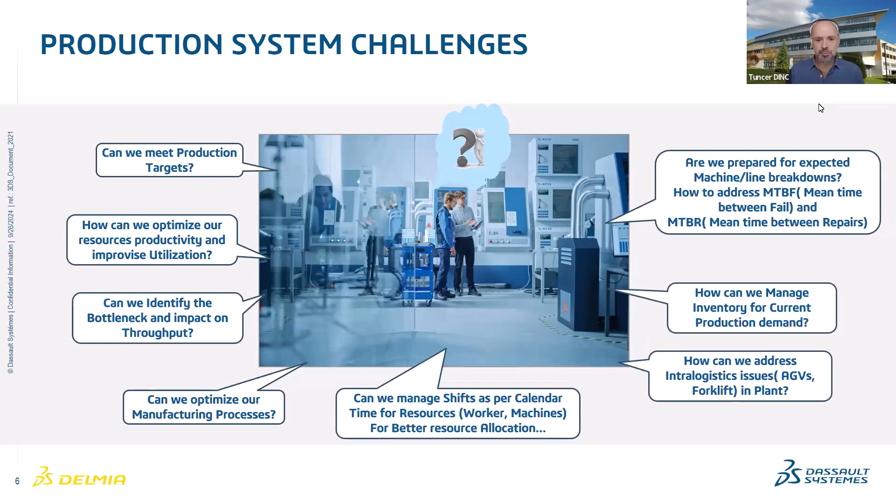We will talk later in more detail. In equipment simulation, you are able to analyze your equipment, with mechanisms, distances, and clash detections. You're able to analyze your toolings and equipment in more detail and simulate them. In factory flow simulation, we take a more generic view of the factory and analyze bottlenecks, intralogistics, capacities, warehouses, and also production areas.

These will be shown now in our webinar, and thank you for joining, by the way. So let's go ahead and see what's next.

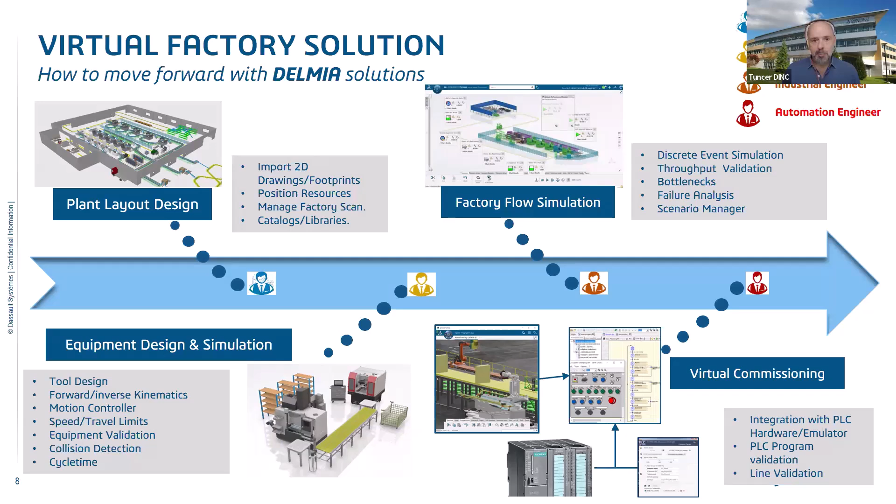This video shows you plant layout design. So we start, as you saw previously in the roles, from plant layouting.

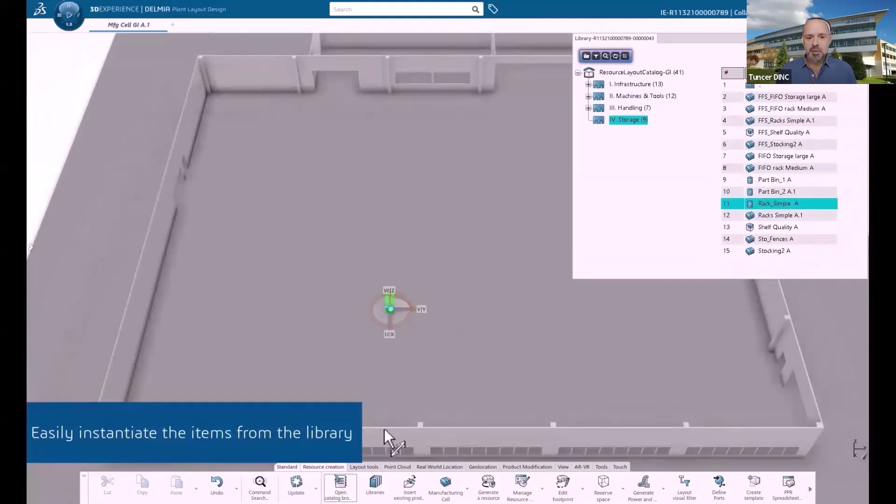You see on the right-hand side, the library manager with classified resources. I'm able to place my resources inside the building. It can be a BIM building, IFC format, or you have a connector to Revit. So we are able to use the real building to instantiate our resources from a library.

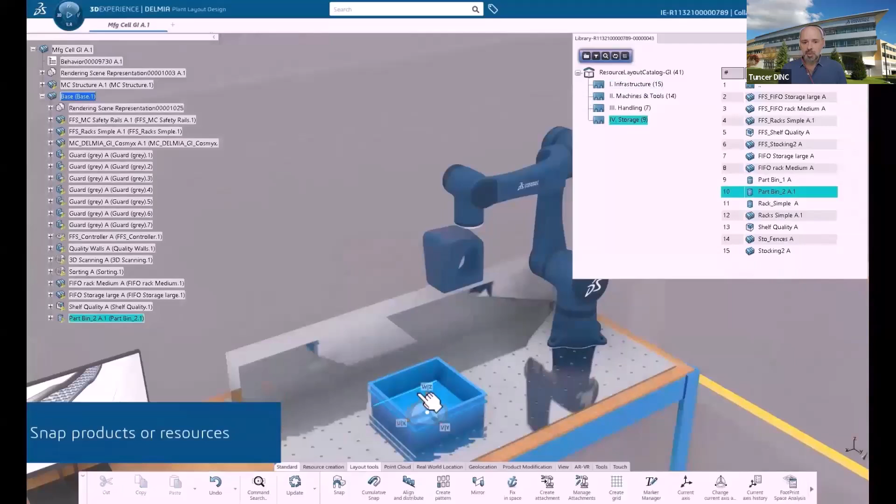You see here how easy we can align and distribute our resources in the production. Also with advanced tools like Snap and Cumulative Snap, we are able to position the resource on the correct location. You see here on the table how to change the references of the objects easily to place them correctly in the rack.

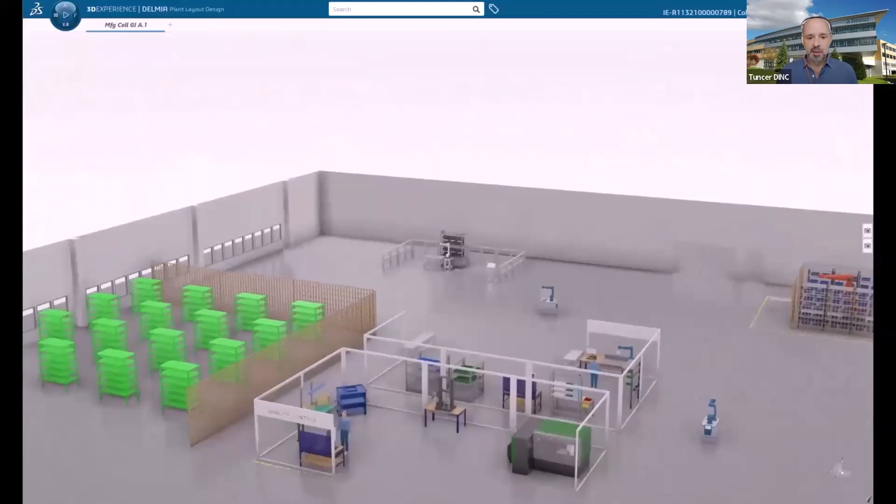Here we see a small deep dive, so very detailed information by the end. You see here also the robots which can be programmed in equipment simulation and virtual commissioning. That means we have a huge robot library with a lot of different robot vendors to be used.

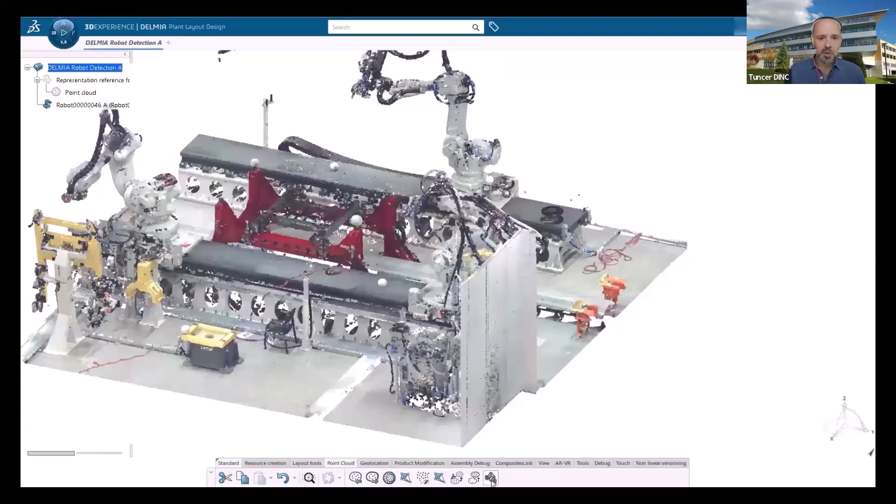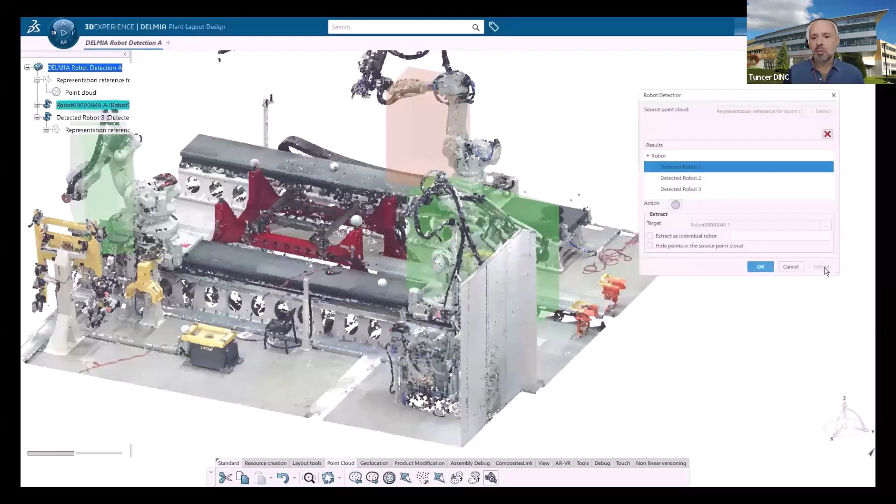Here you see the point cloud section, very powerful: point cloud, E57, XYZ, ASCII, and so on. We are able to import these point clouds directly into the 3D Experience platform, and we can recognize different objects. You see here the robot can be recognized, replaced, and later on you can do your offline programming directly using a point cloud, because we don't always have factory design, or the buildings are quite old, so we need sometimes scans to bring it into the 3D Experience platform.

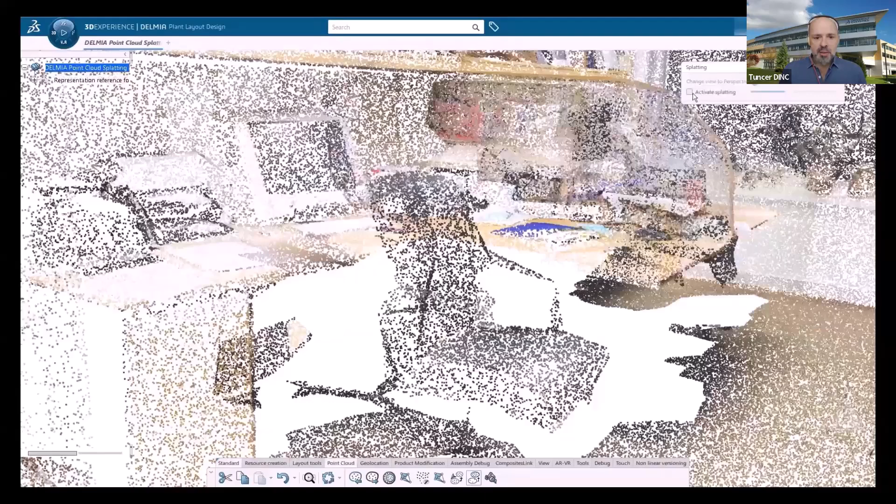You see here also some news in plant layout, which is also quite powerful: changing the visualization of the point cloud. Sometimes it's difficult to understand, dependent on the points, how many points are in the scan, what is the geometry. This is a quite new functionality to change the visualization of the point cloud.

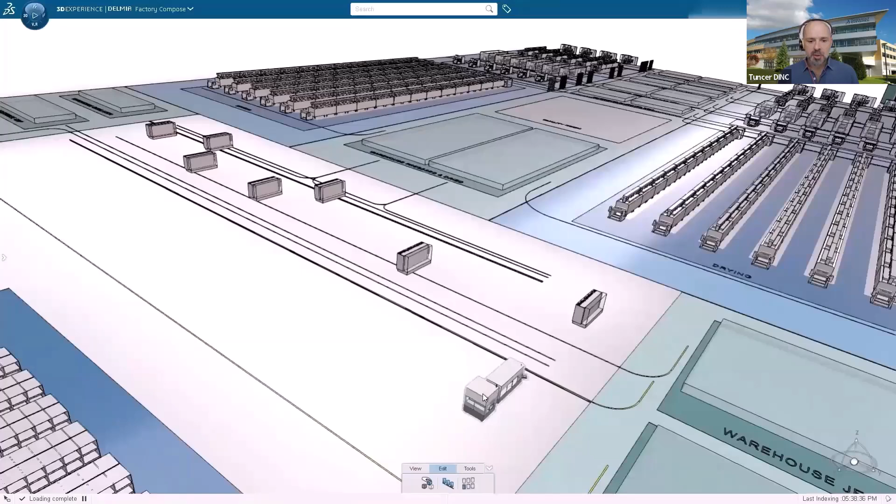Here again you see a huge factory, easy methodologies. The difference here is it's not in the 3D Experience platform directly, it's in the web browser. FLR is a new functionality, a new role, where we can do your layouting in the web browser in a widget, and you're able to do your layouting directly from the web browser.

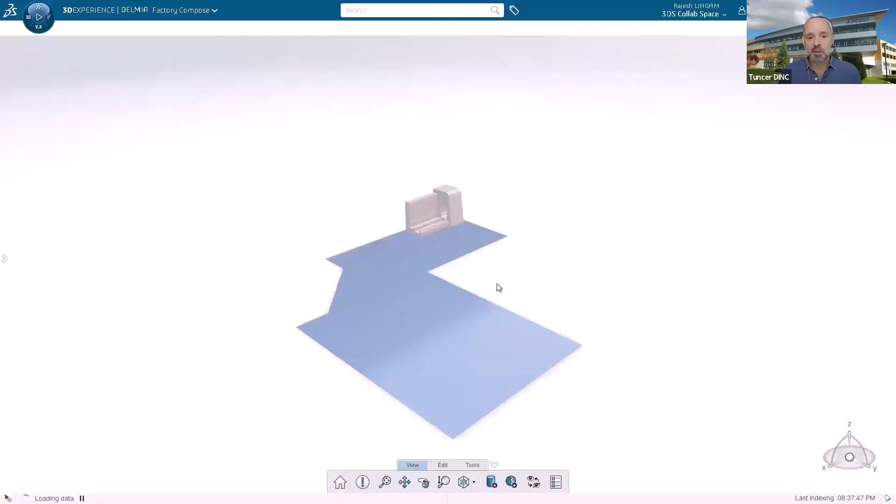Same here, this is still factory compose, as a role FLR. You are able to do your layouting everywhere with the web browser connected to the 3D Experience platform, and easily instantiate your objects from a library directly from the platform to your layout. Immediately you can then prepare the session for anybody else who needs to do a factory flow simulation or anything else.

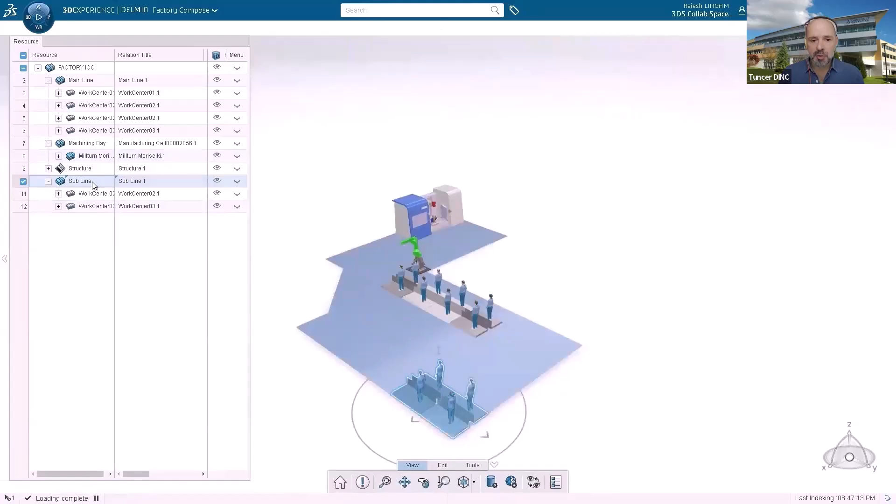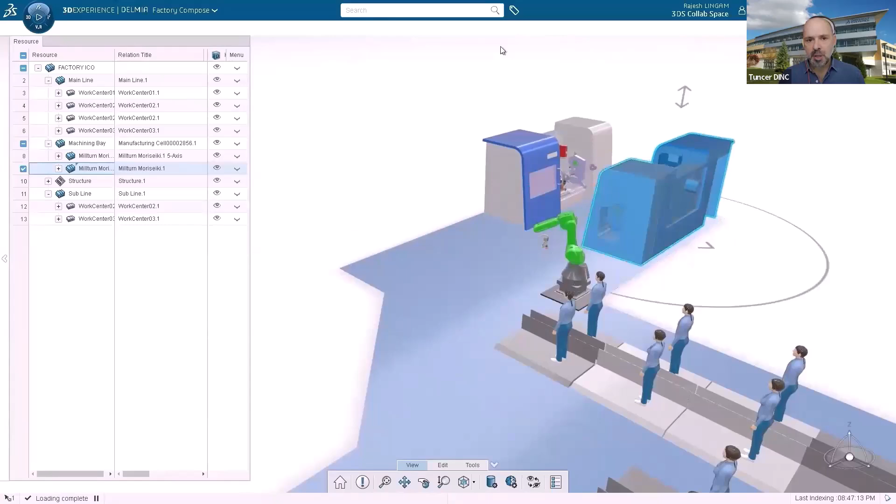So we see here how to place the machines, how to position the machines, how to generate the resource structure, to rename the objects, and to position them correctly in the layout. Very easy, fully supported through the web browser, and the role, as I said, is Factory Compose, FLR, fully web-based.

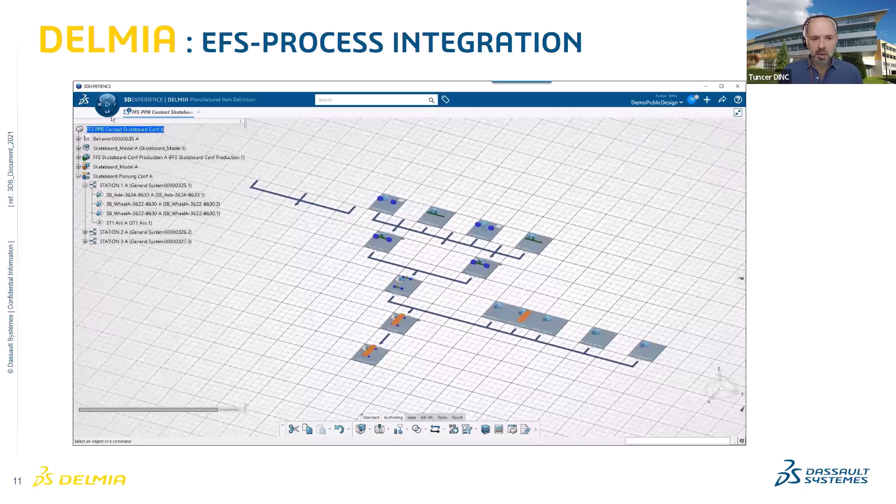So here we see a quite important topic, not to say the others are not important, but this is a PPR context, meaning product, process, and resource. Quite simple scenario, but very powerful, because it's a configured product structure, a configured MBOM, and also a configured process.

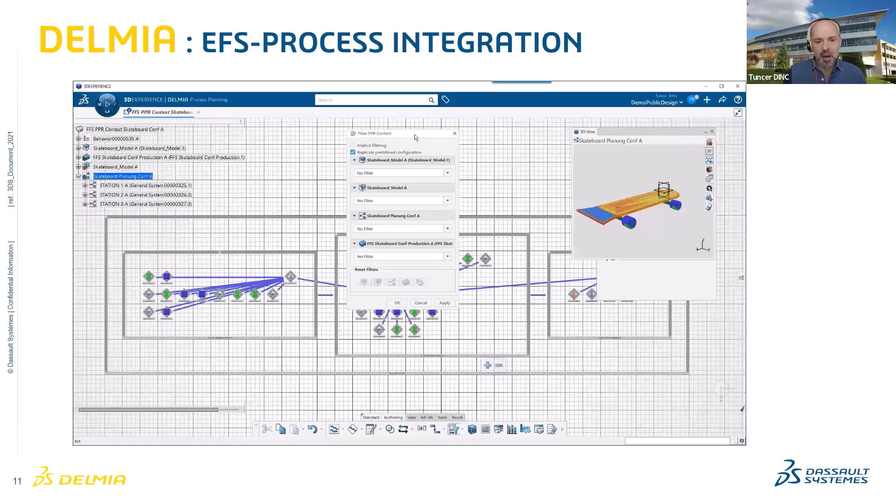We use here different product variants. They are planned in a 150 EBOM, 150 MBOM, and 150 process. You see here how we do the in-session filtering, and dependent on the variant, we see only the processes which are necessary. This is fully integrated into factory flow simulation.

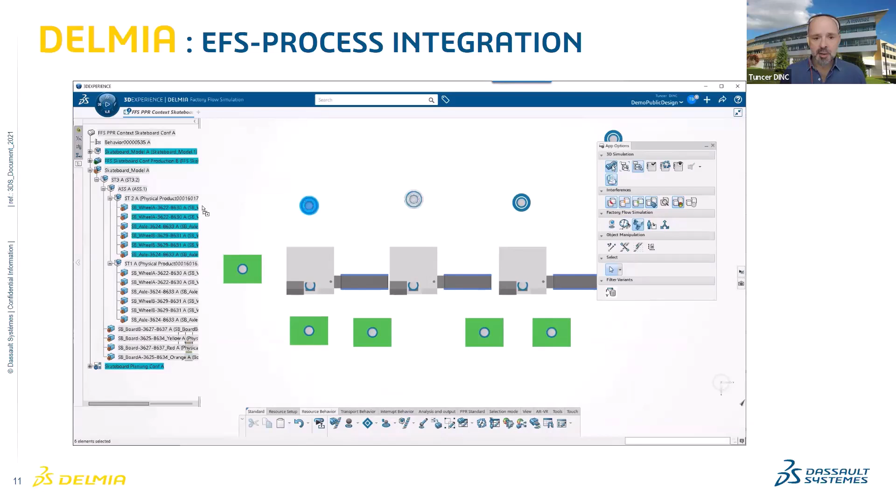You see by drag and drop, we assign the manufacturing BOM into the in-zones, and we do the same with the processes. That means we consume the entire planning information into the factory by drag and drop. So here you see the process structure, meaning station information, processes, process sequences, and process times, used by drag and drop into factory flow simulation.

And then the driver is not anymore this guy who is doing the simulation, the factory flow simulation engineer. The driver here is the process planner, who plans the process, who decides in which station which processes need to be executed, with the estimated time, analyzed time, enriched by time analysis. So the driver is always a process engineer.

And at that time where we get a new revision of the process of the MBOM, of the EBOM, it will reflect then automatically the simulation.

And so you have an easy integration from a PPR planning structure to factory structure, which will simulate then the process information easily. Here you see how to access the configuration.

So here we generate the configuration sets, meaning everything which was done in the process is used in the simulation. And so we define which variants need to be reflected in the simulation.

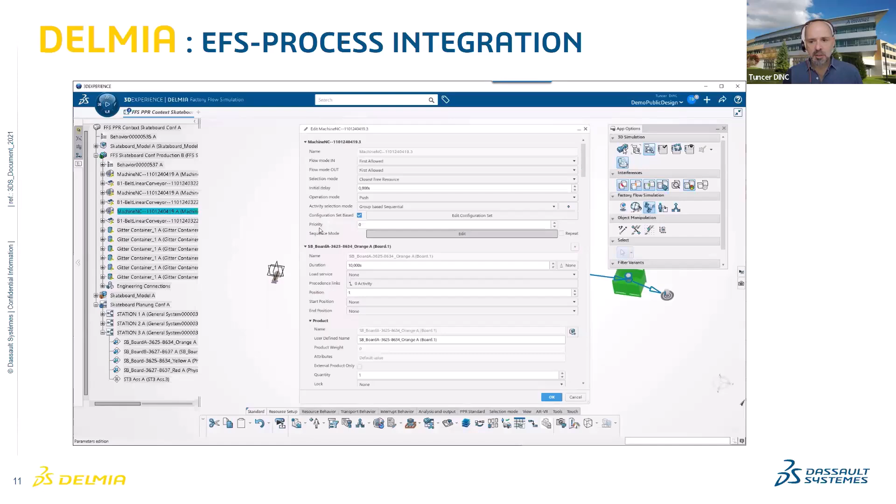So you don't need to code anything. There is logics information which can be coded, but this is only if you need some specific behaviors on specific machines and resources. Most of the functionalities are out of the box and in the user interface.

This makes it very simple also for a layouter to do a simple simulation without having any knowledge in programming. So you see now easily these variants are produced dependent on my production schedule.

And so you see the machines running, the conveyors running, because all our resources already have the intelligence to be simulated. So if you have any other geometry which is imported, you can easily do it in equipment design

or equipment simulation, as Ali will show later on, to be able to use it in the simulation in the factory.

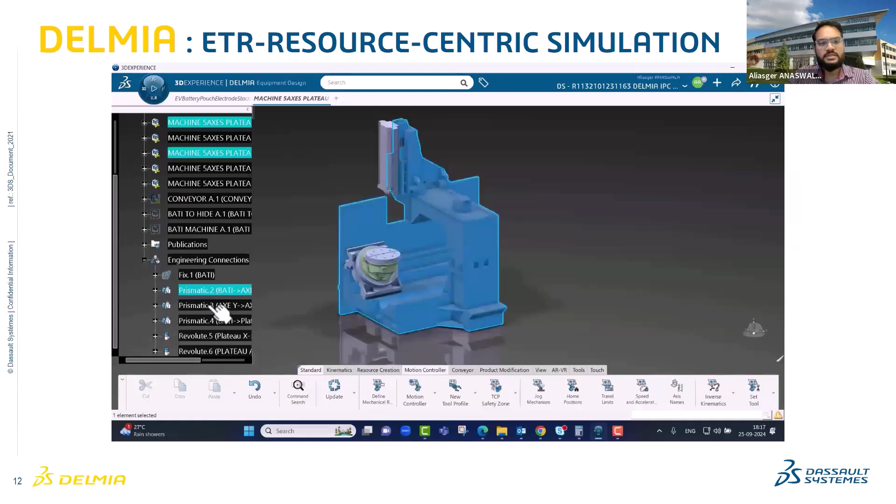Here we have a 5-axis industrial machine and some engineering connections are defined onto it, developing some kinematics. These are between the specific elements of the machines. Related to these engineering connections, these joints and commands are created.

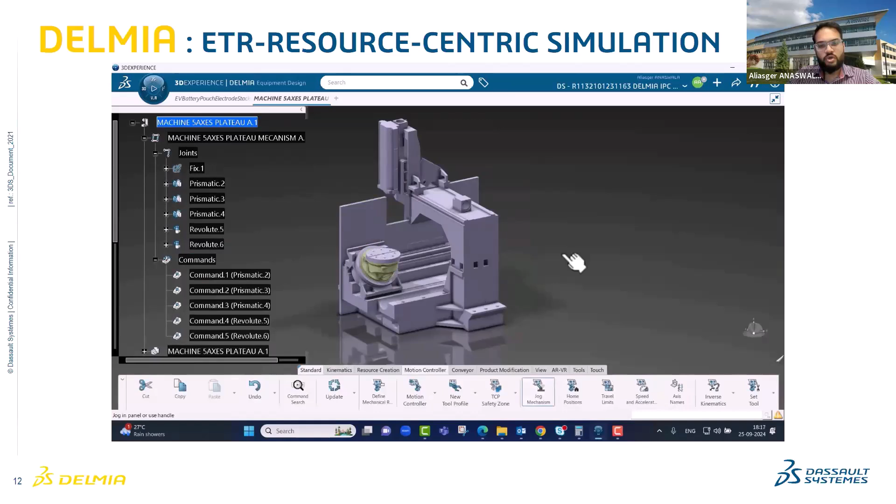Now, inside equipment design, we can check which mechanisms are there, and as a mechanism manager, what is the degree of freedom status, allowing us to jog them with respect to individual axes and creating a kinematics as well. So this inverse kinematics can be done with the robot, and can be taken forward.

Next is to define some home positions within this so that they can be directly used when we are teaching this machine for some programming, an NC program, or even to use it directly in factory flow simulation.

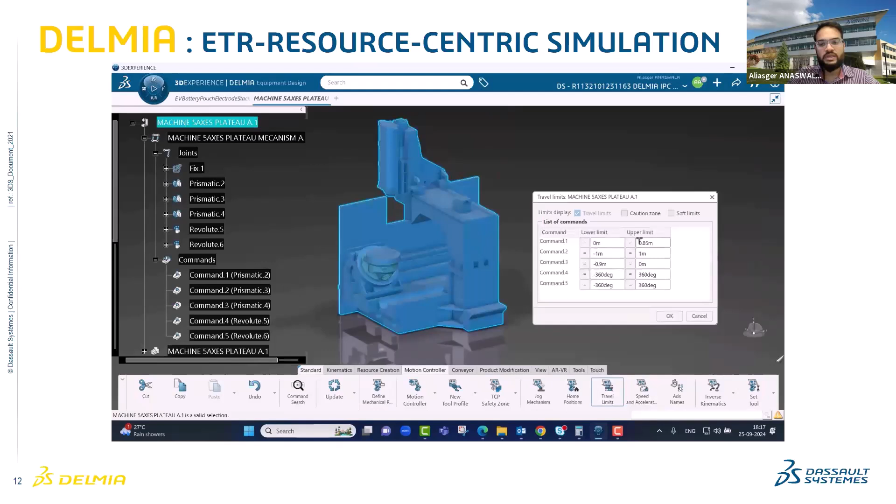Travel limits can be defined onto it, providing soft limits as well. The color coding will be there for soft limits, defining that it cannot go beyond this point. So while simulating, it will give some warnings and signs.

Next is to simulate the equipment inside equipment simulation. Here, if you see, this is a master task where the sub-services or the sub-tasks from individual robot cells are called upon, and they will run in parallel because the functionality is provided in such a way.

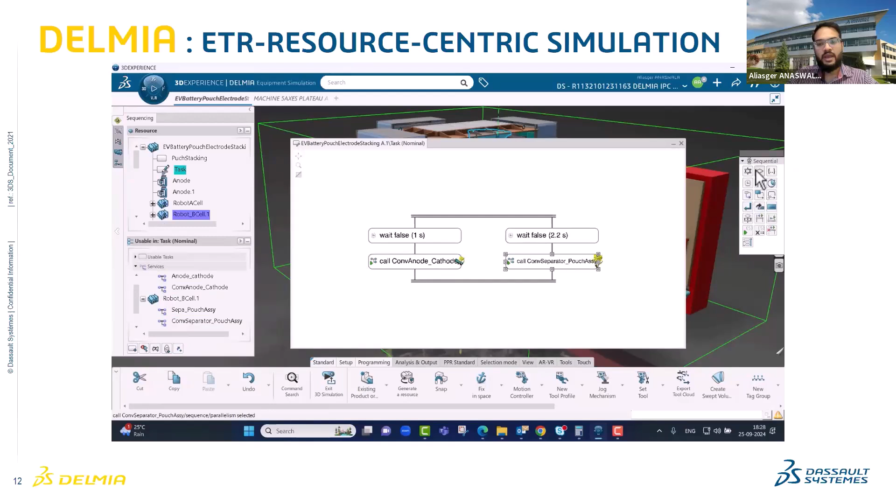There are other conditions that can be applied, such as wait for conditions and other things. More to this, if you go to the individual robot cells, the control equipment is defined for this particular robot equipment, which will allow us to use it for different functions as well, for different cells.

In the setup, we can teach the program for this control equipment for this particular robot, and see the individual conditions that can be applied to this individual robot, not just to the main task.

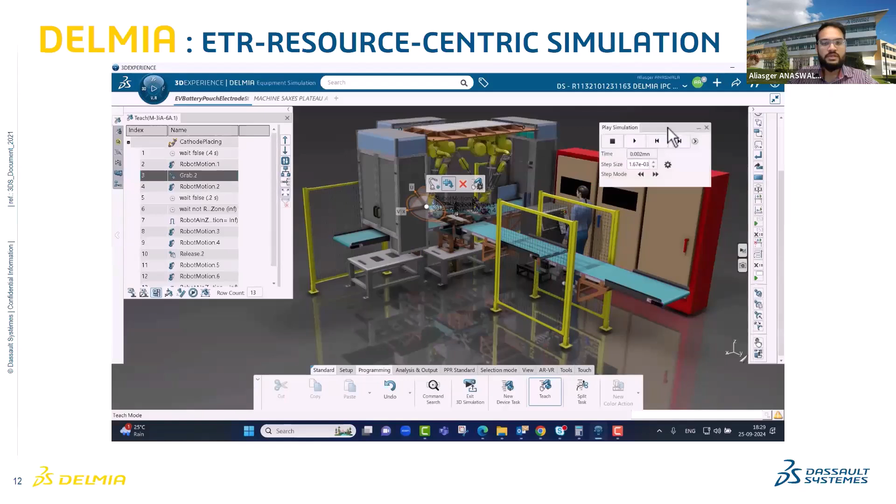Here we have defined some grab activities, some fault conditions, and the release activities, to have a realistic scenario of how it will perform in the actual environment. Now, these signals can be linked with the robot input and output signals as well.

Once we come out of this teach pendant and click on the control equipment, it will show us the signals that have been generated at the resource level. This can be propagated to the master level. This is for robot cell B. As an input output, signals are provided.

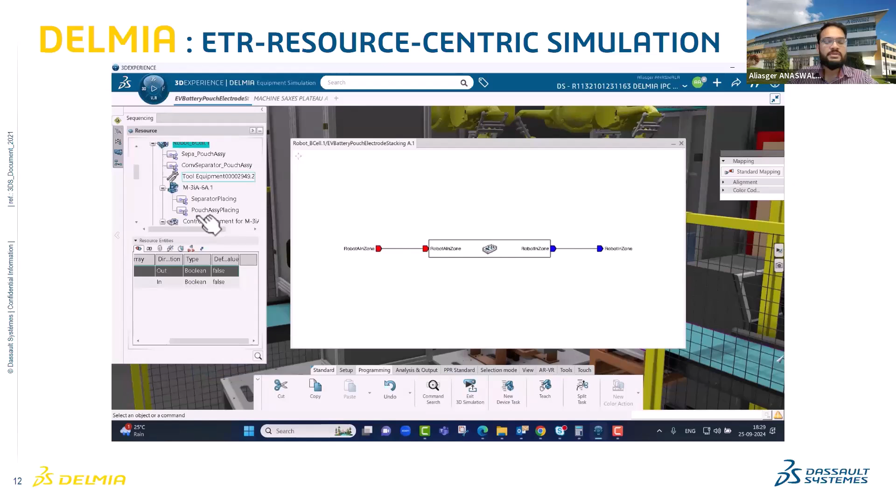The same can be seen in the IO mapping editor for this robot or for this control equipment as well, where we have linked this with the higher level to have a multi-robot simulation like this. This is for robot B cell. The same is applied to robot A cell, and then it is propagated to the master cell.

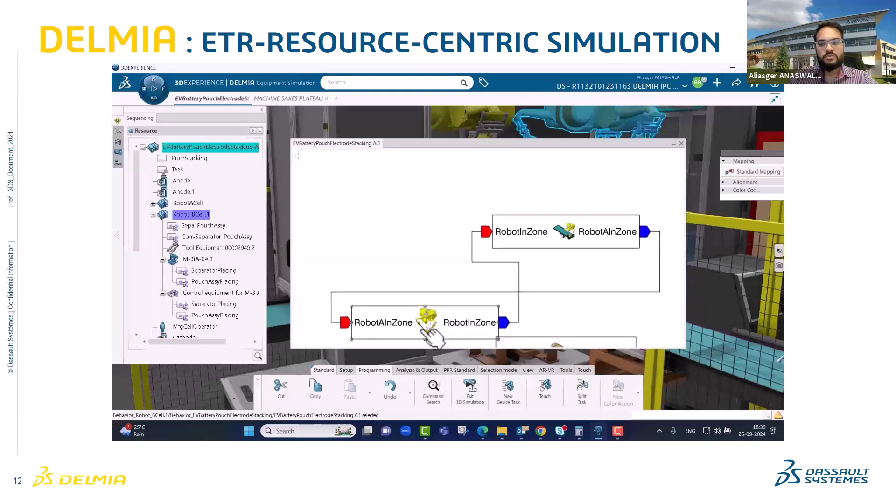Inside the IO mapping editor, we can have these definitions. So both the robots are interconnected with each other, to avoid interference and interlock with each other.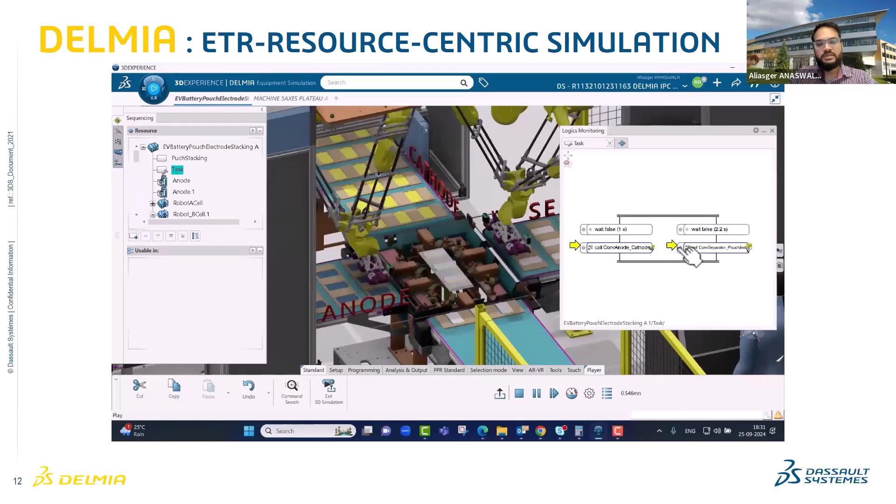Now, when we simulate this as a master task, we can check the live signals when the simulation is running, which task is running, and even we can play and pause those tasks. This really helps if we want to do an equipment simulation at a resource level, understanding collision impacts and cycle time of this robot, and then later take this when doing factory floor simulation.

If we want to stop one of the robots and see how the other robot is performing, we can play and pause those tasks and have an overall idea.

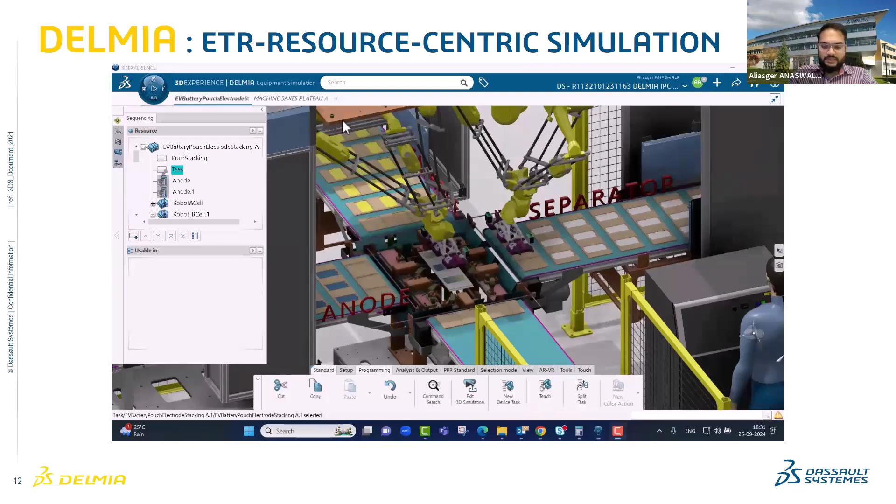This was all about the resource-centric simulation. We now go forward to factory floor simulation. In factory floor simulation, we'll first take the Kanban management.

When we say Kanban management, and when we say that we want to run the production system on this aspect, it is in a way to run it in a pull mode.

Now there are basically two modes, push mode and pull mode. Push mode is about building things built to stock, like we have in a T&M industry or automotive industry, where we build items, stock them in the inventory, and later push it into the market.

Against that, there is a pull mode of working, which is a kind of build to order, like in a high-tech industry or in the aerospace and defense industry, where we produce as per the customer demand or as per the order received by the company.

Here, based on the order specific to that order, we pull the parts into the production from the supplier side as per the demand, in one way to also implement the just-in-time manufacturing scenario.

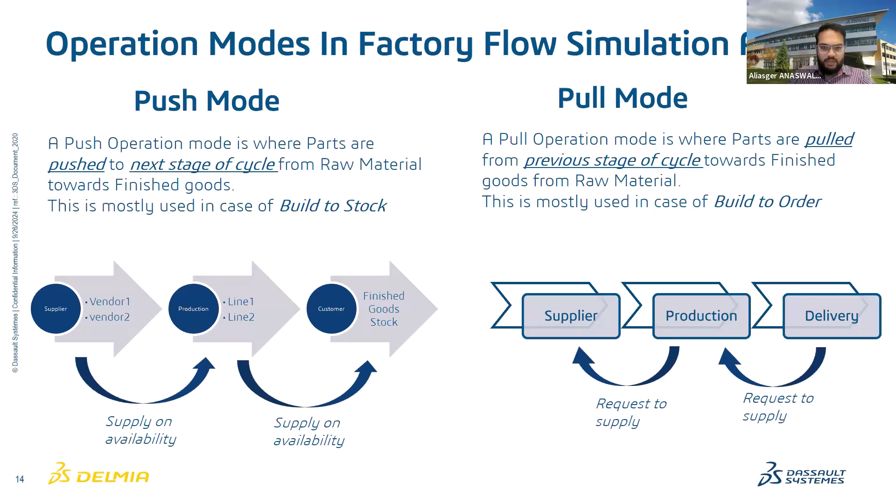We'll have an understanding of how a typical Kanban production loop will work. So based on the customer demand, week-wise or month-wise, we prepare a production demand planning for that particular week. Based on this production demand planning for different assembly lines, we build a dispatch order.

We build a leveling board, which allows us to define which product we need to dispatch at which point of time from the resources or the dispatch area. With the help of this leveling board, the production cards and the withdrawal cards are triggered.

Based on this dispatch order, one withdrawal card will get triggered at a particular time, meaning one part will be dispatched from the company to the supermarket or to the customer area.

This triggering of the withdrawal card will pull one item from the safety stock, and this will ultimately pull a production card, triggering the production line to build one more item, generating a request.

Basically, triggering of the production card will pull an item from the pool stock or from the supplier side. So the supplier will get an intimation to produce one more part.

Following this way of production allows us to maintain the inventory level, stop overproduction, and meet the customer demand in a way to have a just-in-time manufacturing scenario.

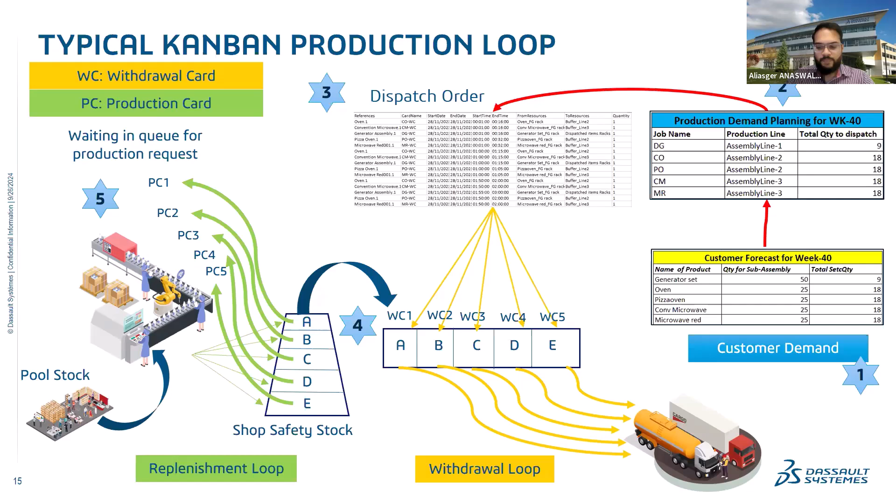We have created a short scenario or demonstration of both a push mode and a pull mode. In this video, we'll talk about when we run from a push way of working, where we have excess supply, and how we can avoid this kind of challenge when we run in a pull way of working.

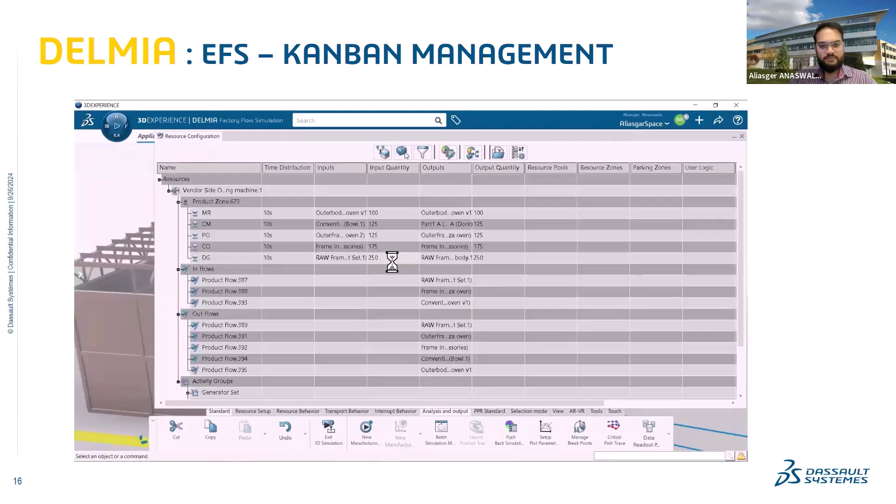So this is a small setup where there are 3 assembly lines, a dispatch area, and a supplier side. Here there are 5 different products that are manufactured, and for these 5 different products, these are the groups based on the customer demand. This schedule has been provided on the supplier side, so it will, in a push way, continuously push the parts to the assembly lines.

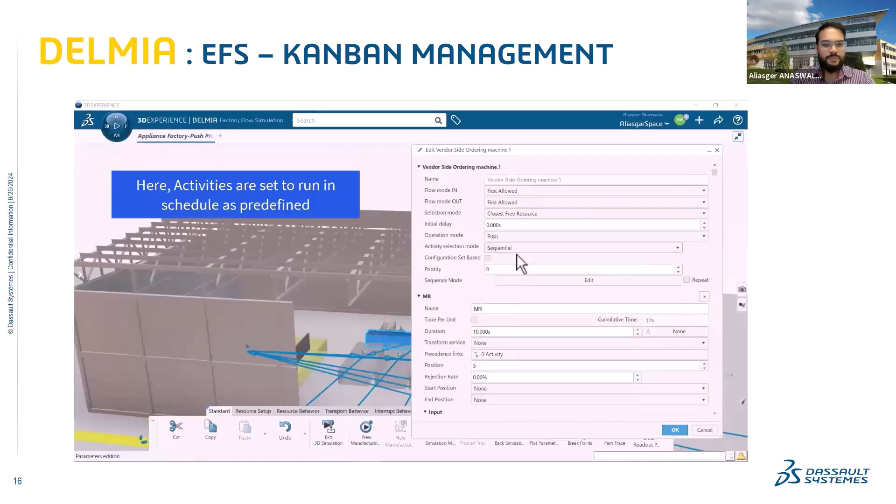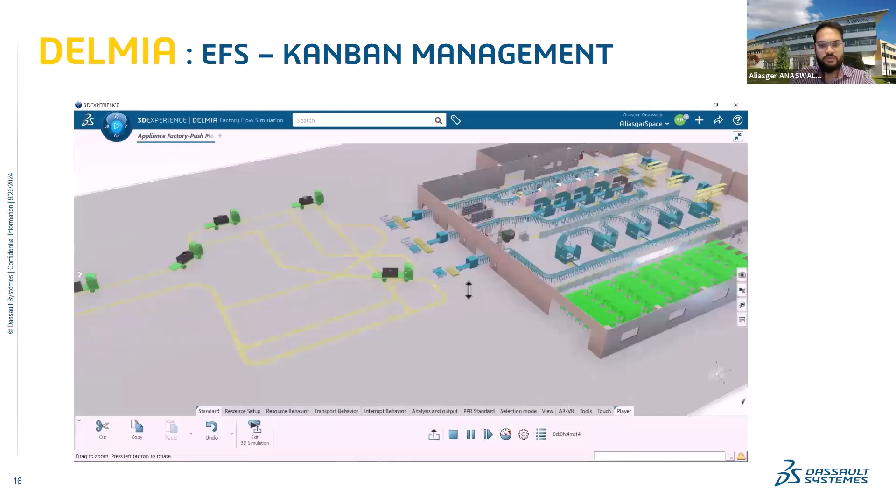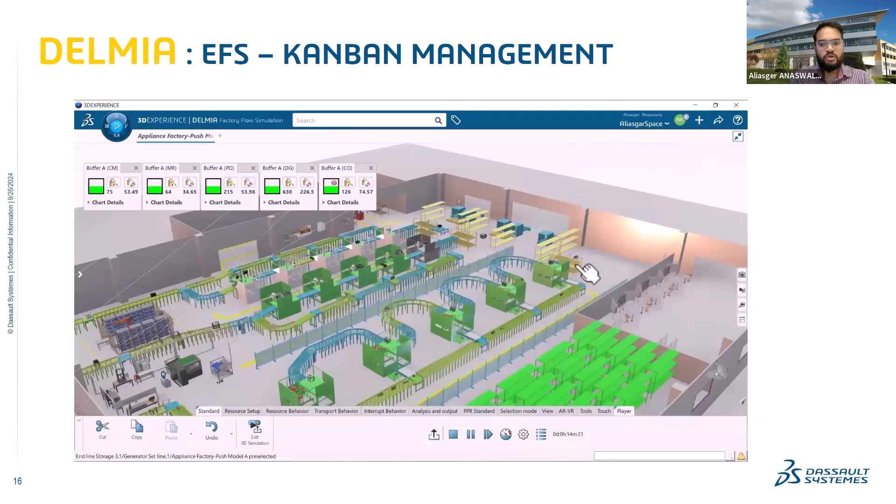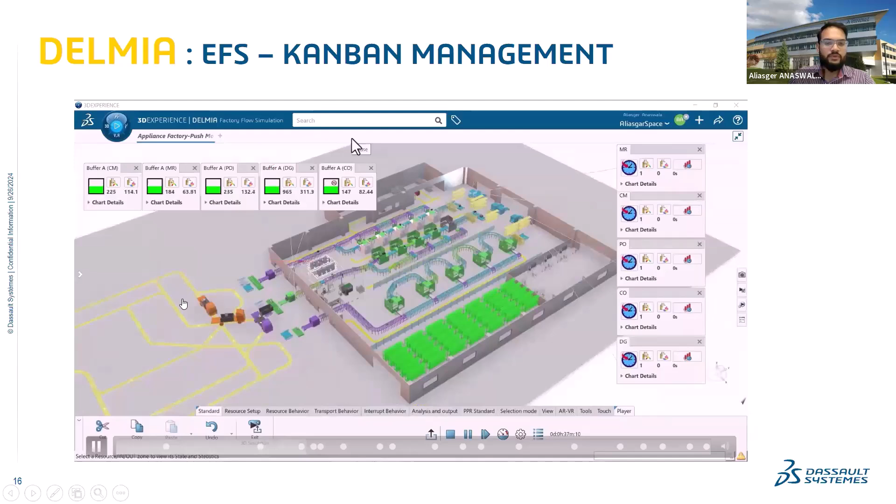After a certain time, this will be overcrowded because there is a limited inventory on the feeder side. With the excess supply, the line will keep continuously pushing to produce more parts. So what we see over here is the number of buffer or inventory at the start of the line, overcrowding or hitting the upper level of the inventory. Let's say by 1 hour we produce this much stock or one lot, but we have an excess of supply over here. So this is overcrowding in one way.

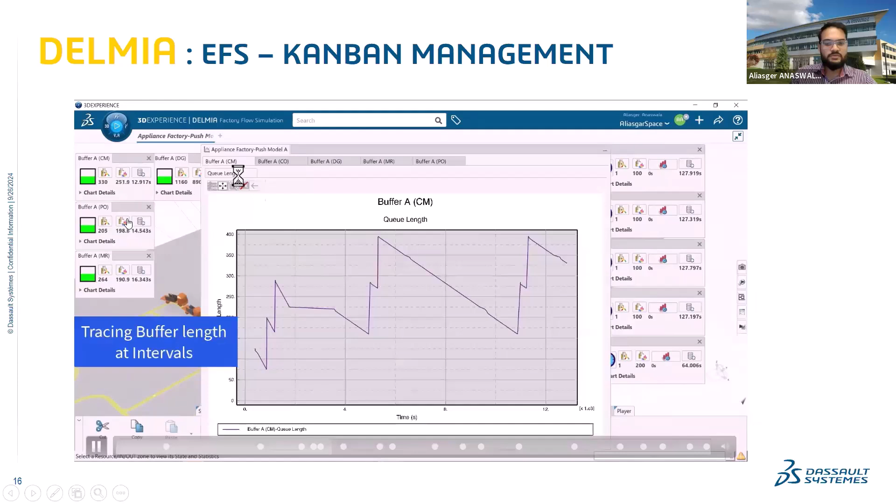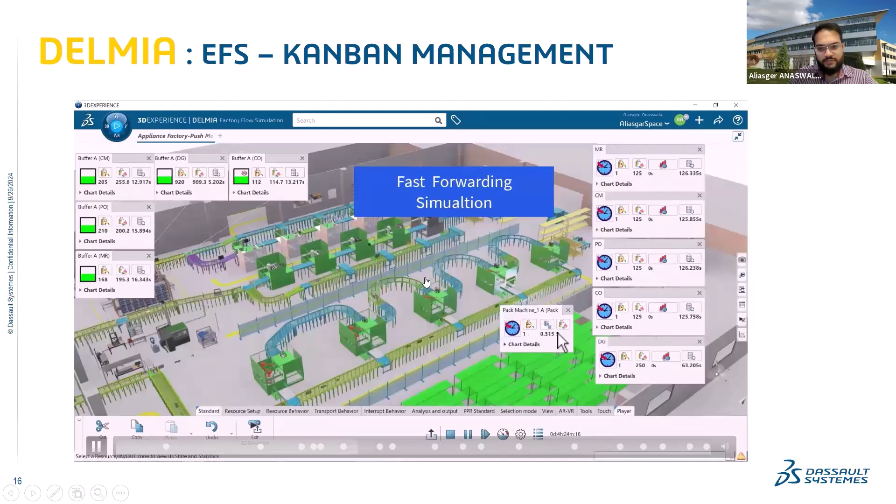That is one of the challenges. If we check the queue length for the buffers, it's always high because of the excess supply from the supplier side to these production lines. Going a little fast, after 1 day of simulation we have these records, and at the end of the shift we are able to produce 225 parts.

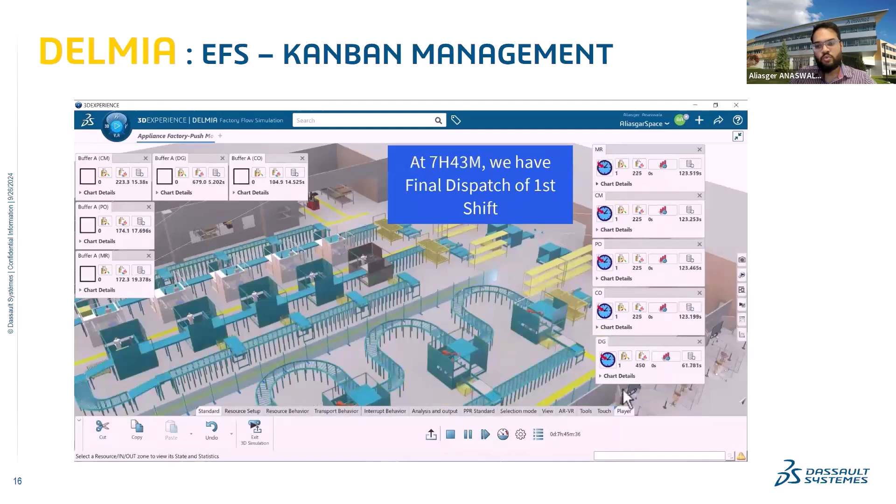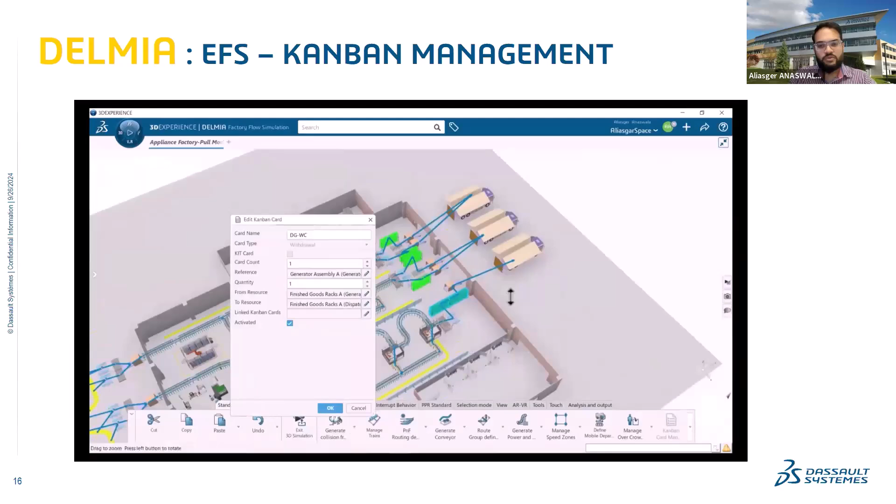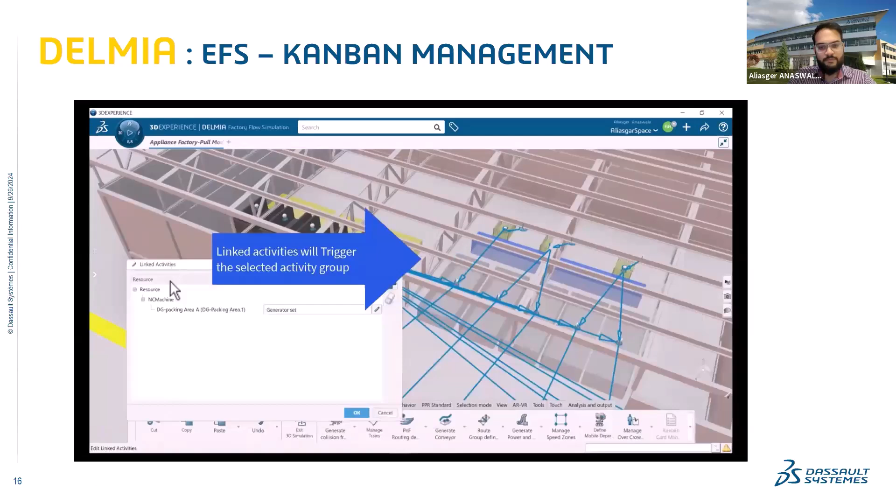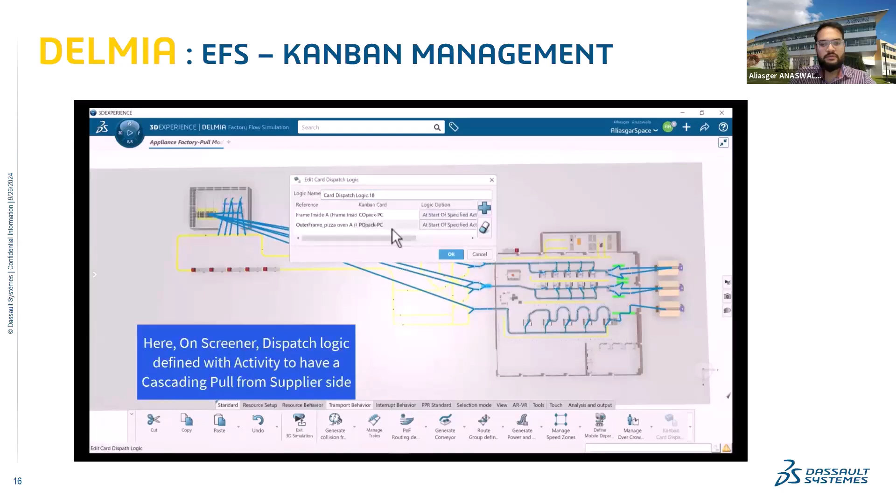Now, against this push mode, if we run the pull mode, first of all we will define some production card and withdrawal card for the products that we have to produce. We will apply this on the dispatch side, from and to the resource from where this card will get triggered. The production cards will be applied to the machines on the supplier side, which will push the supplier to provide the parts when they are required and not before that. The dispatch logic triggers where this withdrawal card needs to be applied on the machine.

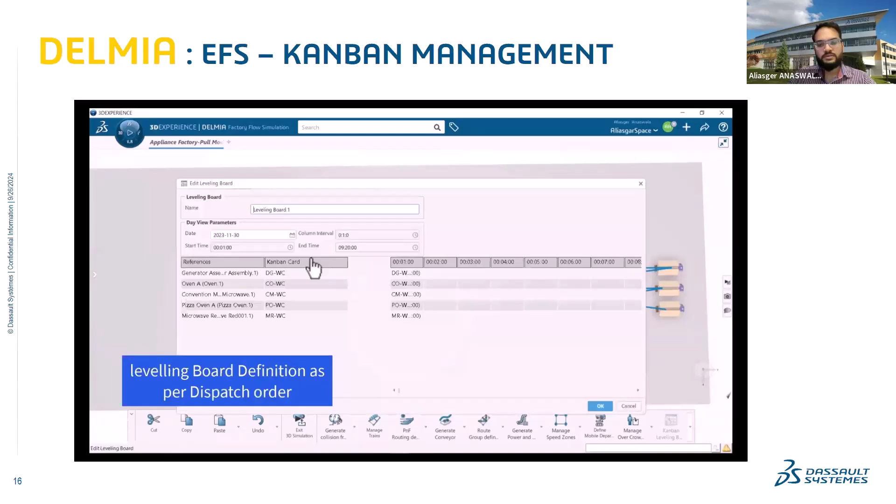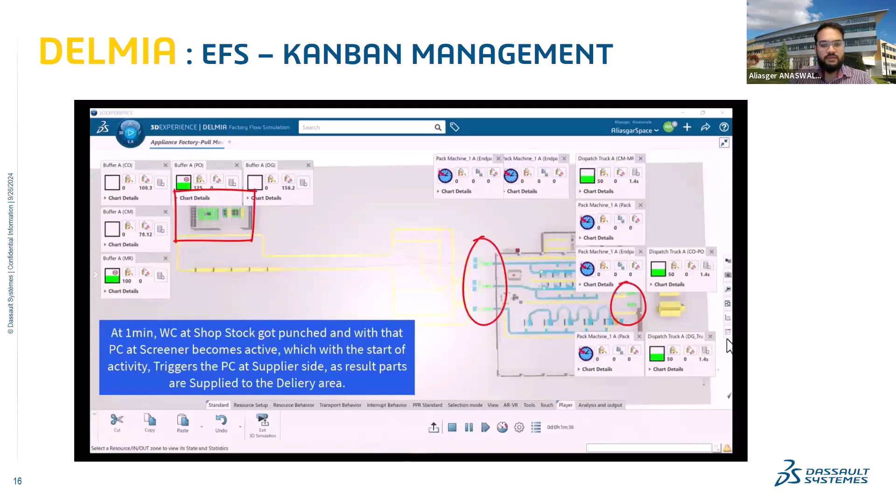Different dispatch logics are set as per the lines, because these lines produce 5 products. So in a way, multiple products are produced as per the customer demand. In the leveling board, as per the timestamp, we define the card. Now, when we run this, we start at 1 minute for the withdrawal of one lot of items.

To run the pull simulation, we can see in the board and the global panel what are the active production cards, or which are the ones in transit that will be triggered next for producing from the supplier side. Now, this is all with respect to what is required on the line side, not in excess.

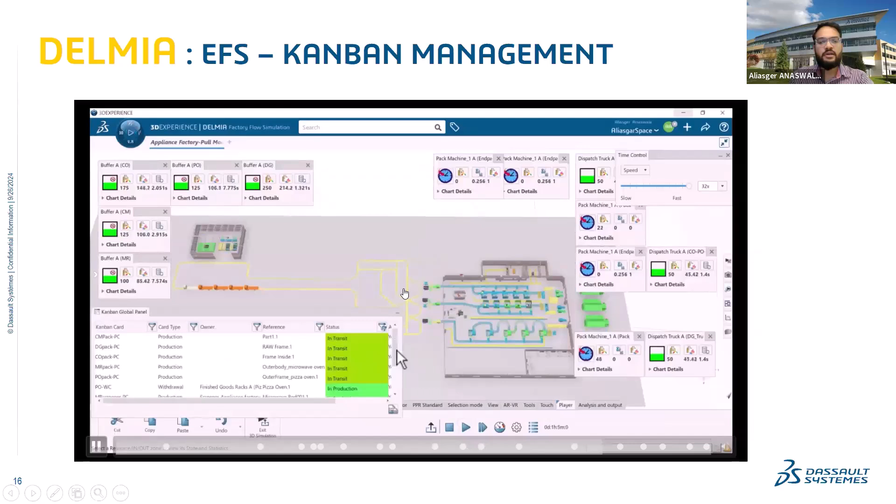If you see these things, this is the inventory level, zero. Nothing is so far available. Whatever is available has been sent to production to produce as per the customer demand. This will be filled up when there is a need or when the card is getting triggered over here. So based on the withdrawal card, a card gets triggered on the production side, and this trigger allows the supplier to produce one more part and send it over here.

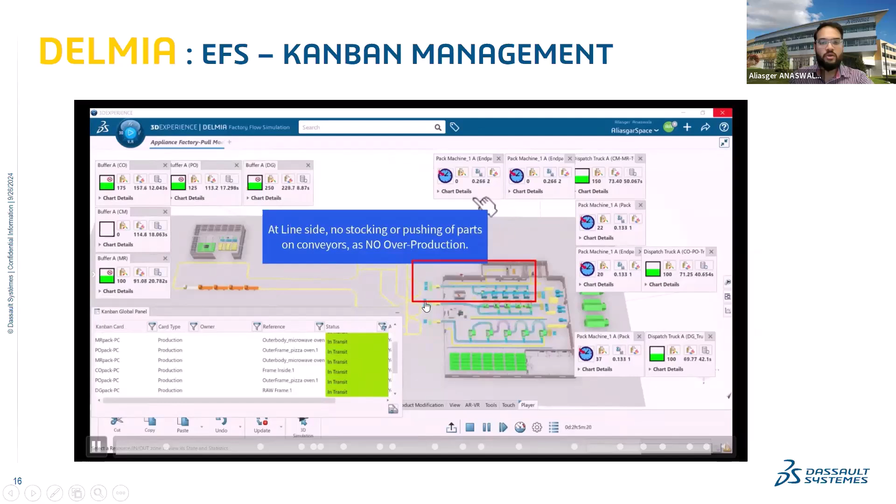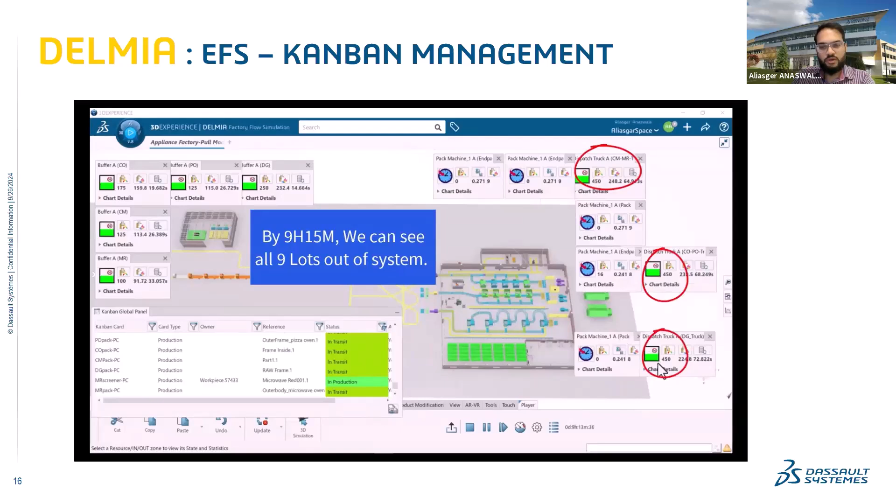So everything works in sync. We manage the inventory level, we manage the overcrowding, we manage the excess production in the line, and have a smooth supply to demand ratio. By the end of the time, we produce the same amount of parts as a lot, but we remove the challenges. So this is how we work with a pull way of working, mostly for intralogistics, inventory management, and for implementing a just-in-time manufacturing scenario.

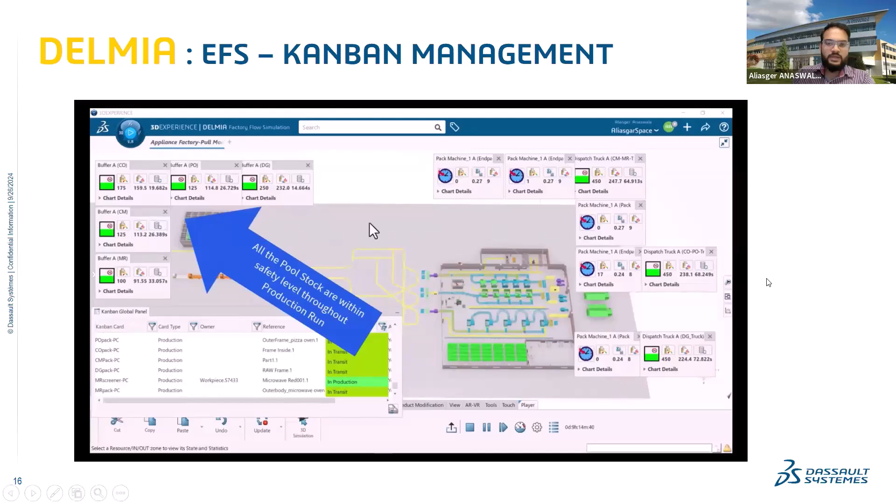This supports well in EFS. Next is to talk about how we can implement shifts and other things, calendar time, into the simulation. If we have a simulation model that we would like to run for some months and years, and we would like to apply shifts into it, then with EFS this is possible.

The major functionalities of calendar and shift are to create different shift types, mark dates as holidays, and allow one of the important parameters, to put some resources in one shift, and if some resources are not available for the other shift, we can omit them and see how the simulation is working.

So as per the production systems, the staffing strategies vary in the morning shift and the evening shift. By running them and understanding the output, when we run it with different resources available, we can manage these staffing strategies as well. And we can understand, based on the number of employees available to run the simulation or the production system, what kind of impact we are getting on the throughput side.

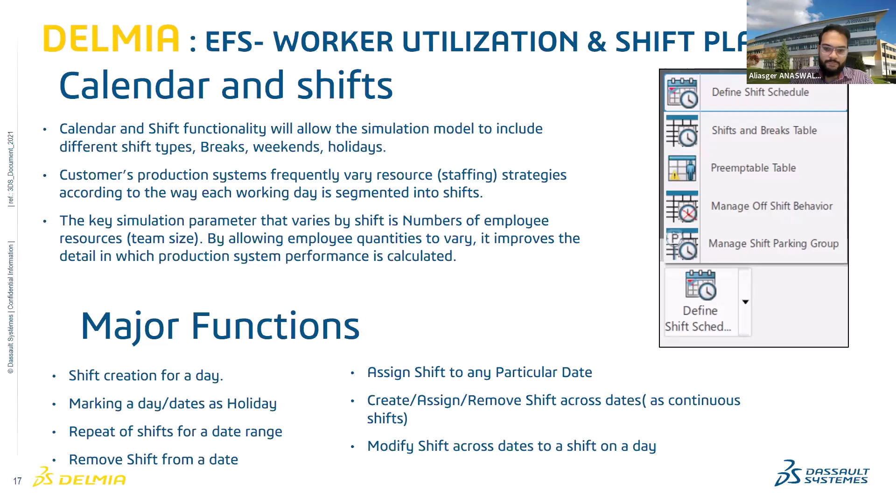Going a little technical, in this video I've showcased how we can define a shift schedule. So these are morning and evening shift, and particular breaks are created. We can assign them into the shifts. So in the morning shift, I have assigned coffee break and lunch break, and in the evening, dinner break and coffee break again. Now this shift I will apply to the calendar for a month.

This is one of the shift models. I can mark the weekends as holidays for the entire month. Now, the same shift I can take from the table and apply for one day.

Then I can repeat the day shift to the entire month, selecting the right start date and end date. Even this can be pulled up for some days as well, based upon the selection it will apply to the particular days. So the morning and evening shift has been applied to all the days of this month.

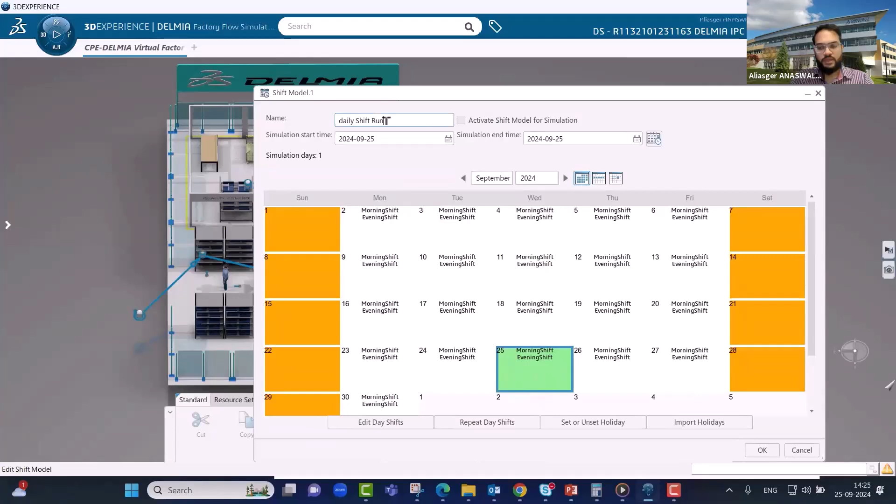You can create multiple shift models as well. This is the first shift model, and if you would like to add another, we can add. Now here, even though I have added for one month, I would just like to run it for one day, so you can set the simulation start date and end date accordingly. I would like to run this for one day, 25th of September. Here we can activate based on multiple selections, and then we run.

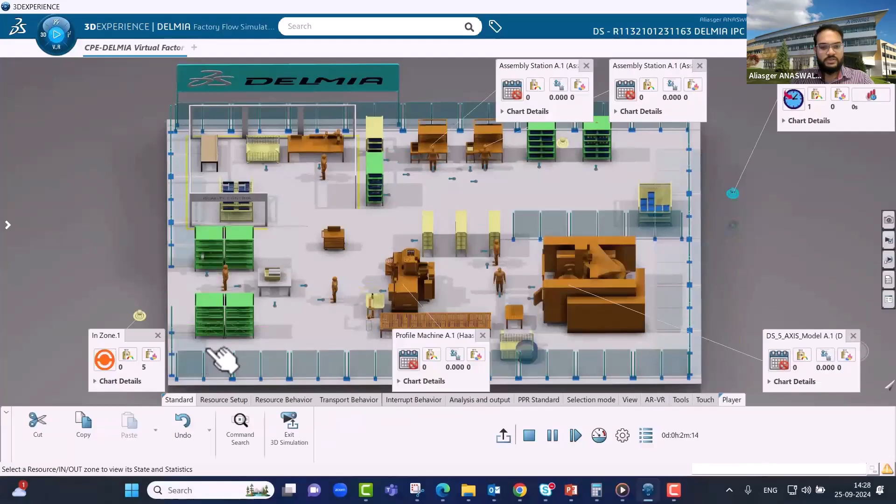So now when we run this, first we see that at 00 hours they are off shift. It will start by 6 o'clock in the morning, as the morning shift starts at 6 o'clock and it will last till 8:30 hours.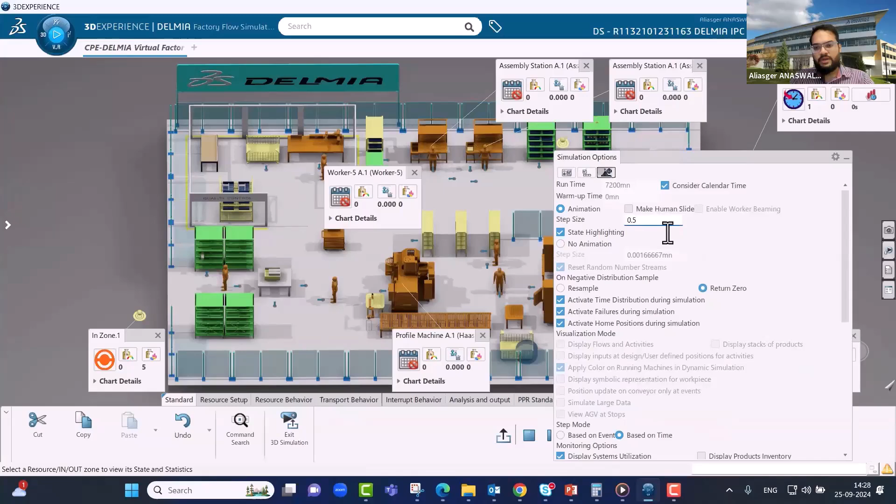In order to run it quickly, I am just manipulating with some preferences, increasing the step size to try to see results faster. So at 6 hours the system is started. Machines are now running, the resources are working. This chart gives us an indication of how many parts are currently produced, what is transferred, and what is the current utilization of these machines.

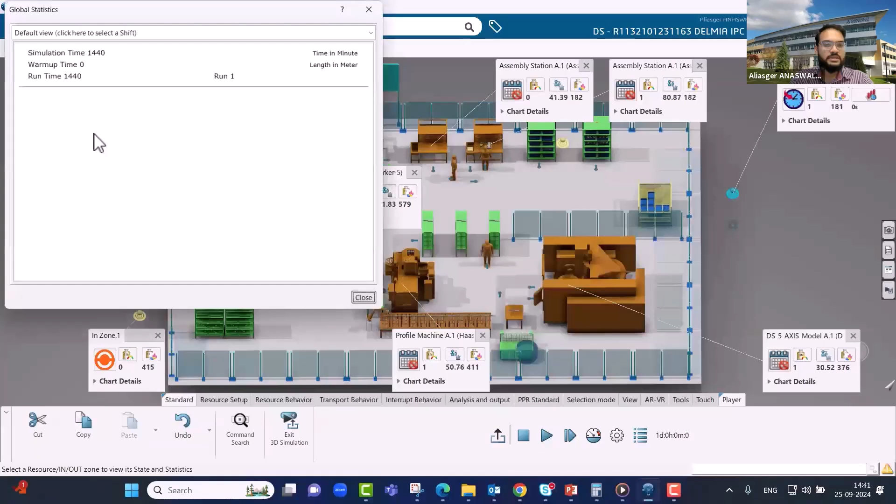I'm sorry, I'm going a little fast since I have to cover many things. So with this simulation, by running after 1 day, we'll have two different scenarios. Going to the system performance monitor, we can take out the results in HTML format, shift wise.

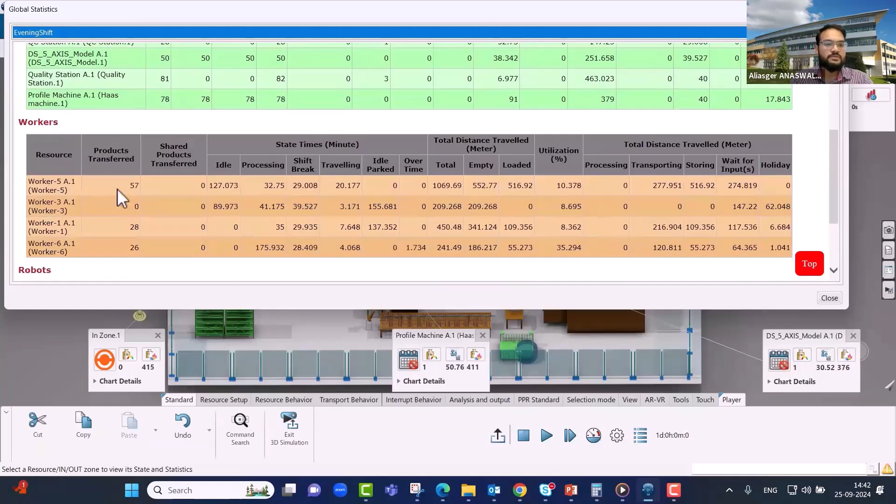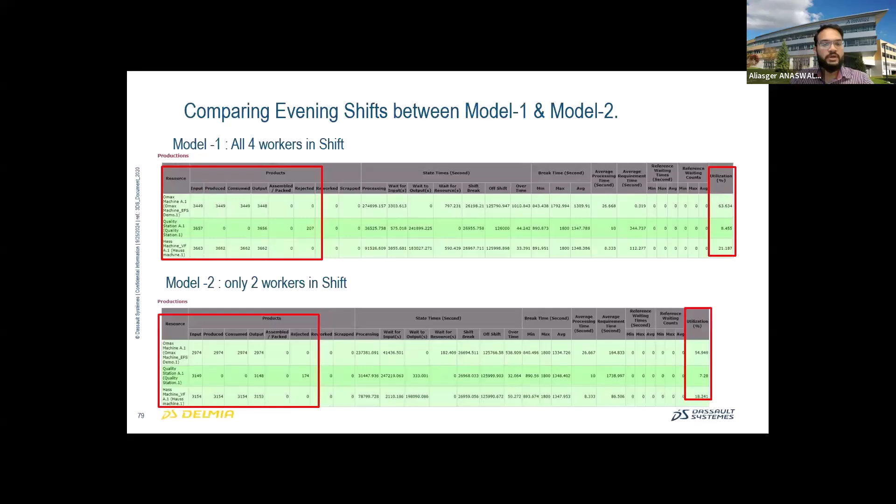From that selection, we can see the morning shift, where we can understand the utilization, the worker utilization, and how many products were transferred during the morning shift. Relative to that, we can see the evening shift where we have less workers. I only assigned 4 workers in the evening shift, and in the morning it was 6 to 7 workers. So we can see the drop in utilization, the drop in overall throughput because of fewer workers, due to unavailability of resources. This is the comparison between utilization and products transferred between two different shift models.

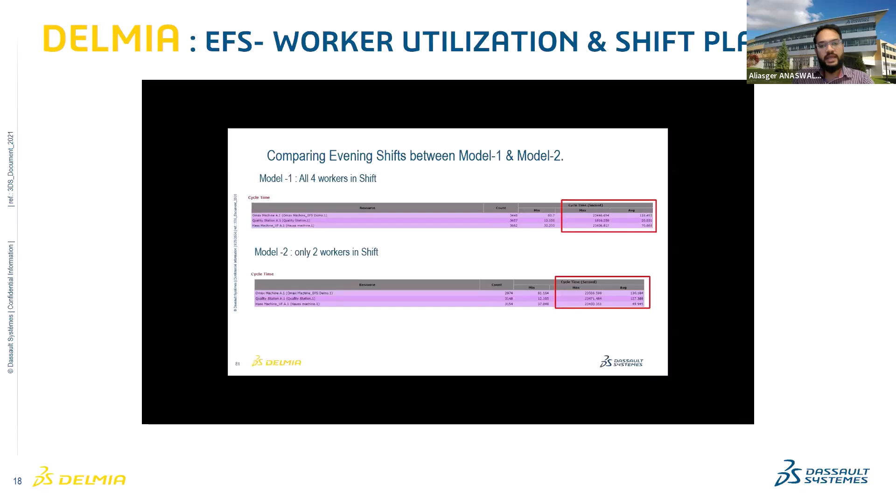So this was all about how we can implement a simulation based on the calendar time, and how we can run a Kanban system. Next is about the scenario manager. I'll ask Tuni to take this forward on the scenario manager.

Thank you, Ali. Tuni? Oh, sorry, I would like to just... no, never mind.

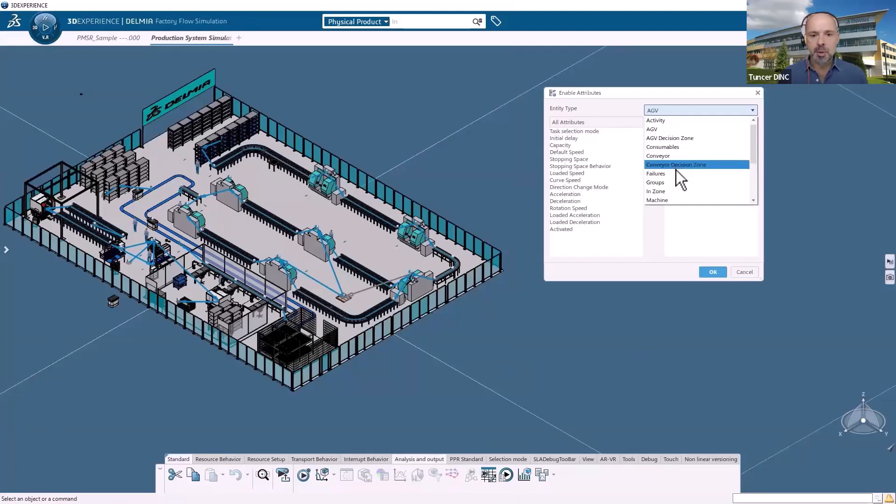So in the scenario manager, quite important - what can we do? You can run a batch mode to have a report, as Ali showed before. But here we want to compare different scenarios to each other. So we are selecting first the resources which should be tracked. Here in the activity selection mode, you can define from activity, machine, AGV, any resources, resource pools, operators, which should be part of the experiment.

So here we define different scenarios. You see here the machines are activated, deactivated, it's a parallel line. We play around with the parameters from a user interface which is very simple, because you see here the different scenarios compared to each other, and you can directly change the parameters in this user interface.

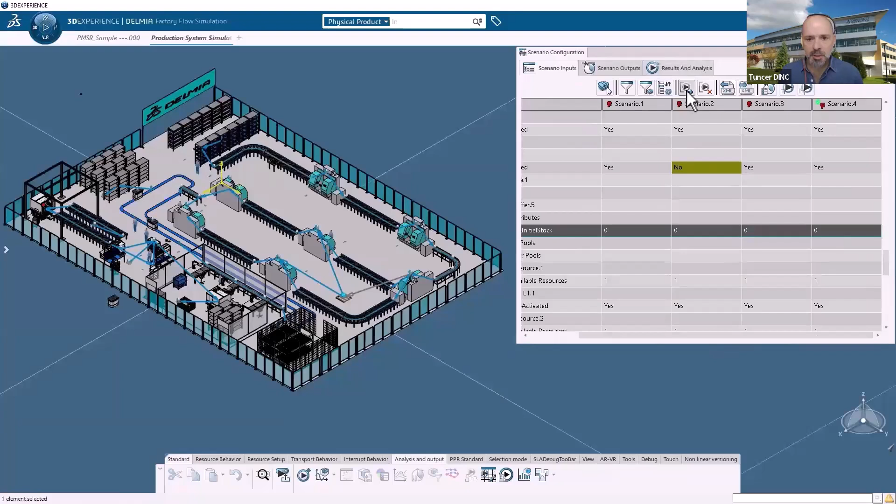And so by the end, we can add as many scenarios as we want, increase or decrease the values, change the times, activate the resources, define how many operators we want to have in each scenario. So you play around with the different values inside this user interface.

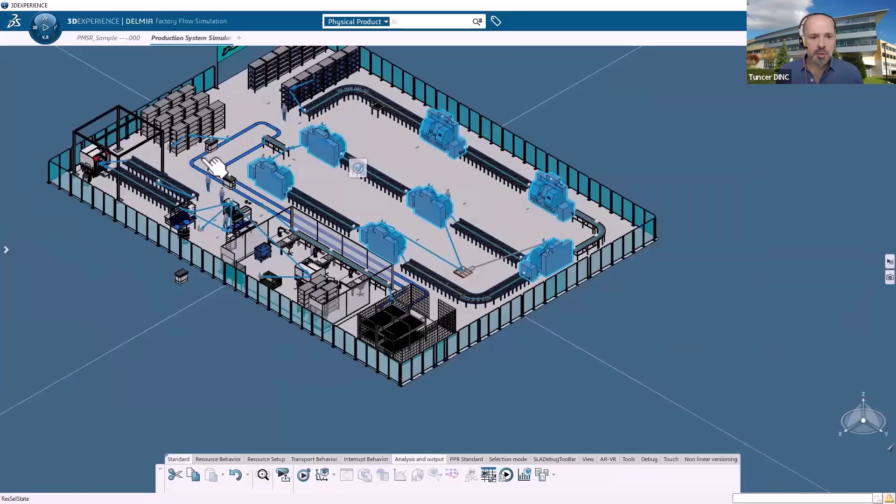We define what should be the scenario output, so we need to select the resources for the outputs. It could be that you play with the machines and the times, but the output is then only the AGV or only your out zone.

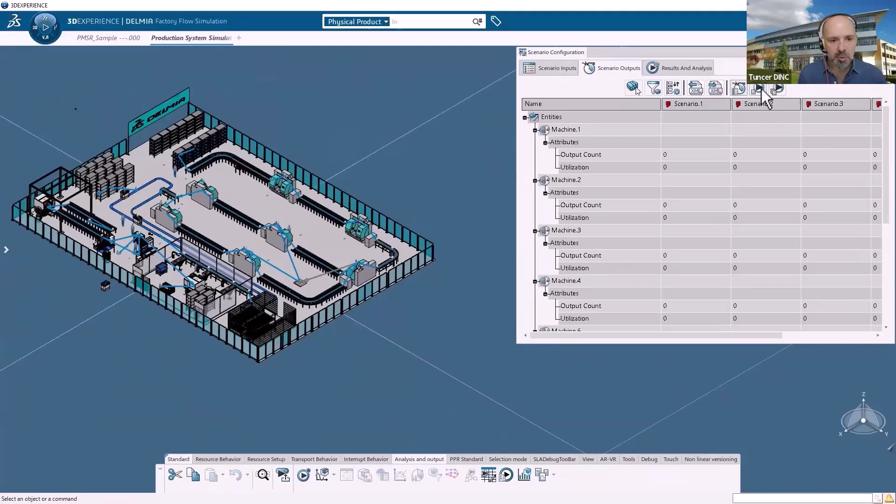We define the simulation time. You see here we have a warm-up time, simulation time, and how many random seeds you want, meaning how many runs. Or you do a warm-up time estimation before, it depends, could also be done in the batch. And you select which of these scenarios should be simulated.

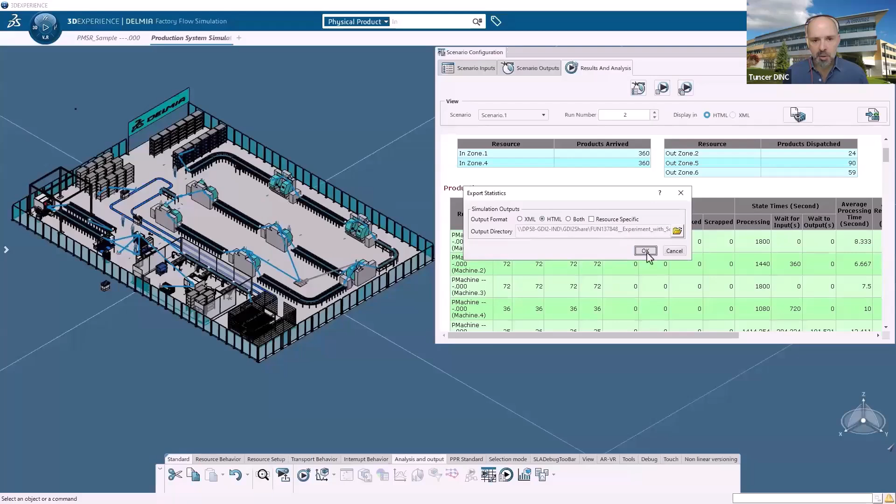As a result in the web browser panel, you get the HTML file or the XML file if you want to use these results in other tools for visualization. You can export this information as HTML, XML, or both, and open it directly or attach it to your line, or have it on your hard disk and open it in the web browser.

This enables you to simulate fast different experiments, so you are very fast to compare your scenarios, validate your production, and do the best optimization which is necessary. So what is the key differentiator of the 3D Experience platform?

We see how we connected all these dots together. Coming from a product, you saw the PPR context, meaning we had manufacturing structure and process structure inside. On the resource structure, either you do a direct resource-centric simulation, or a process-integrated simulation by assigning the processes into the resources. In total, we talk here about the PPR context.

With the factory scan, your plant layout, your process information, and the resources you added, you can do your factory flow simulation for validation, and then a step forward to do virtual commissioning by connecting your PLCs to do software in the loop or hardware in the loop.

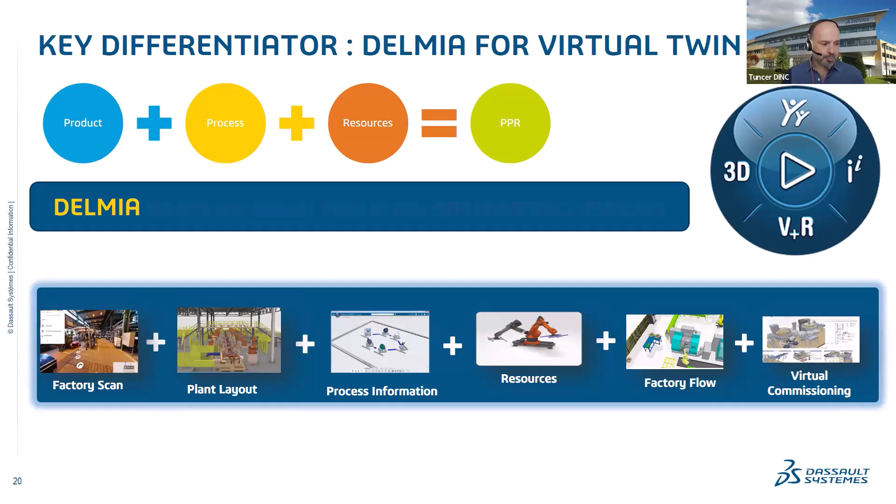So what are the key values? First, we reduce time to market. We validate our production system by building it first time right. We can simulate what-if scenarios and eliminate any production challenges. We improve our equipment design.

You saw Ali did the kinematics, changed the distances, did the validation, did the collision check. So we validate this tooling, we interact with equipment, we make the design collision free.

And we can reserve space for future expansion. In a brownfield scenario, you have the ability to say, okay, what happens when I need to build another line, an additional line, a parallel line? Where should it be? How is the intralogistics between these two lines? We can already think about the future and say where this space should be allocated.

We optimize our system throughput, so we understand where is my bottleneck, what happens when my system breaks down, which repair and maintenance activities do I have, how many operators do I need, who will do the maintenance. We see the resource utilization, and we can think about eliminating high utilized resources, not only operators but also AGVs and machines.